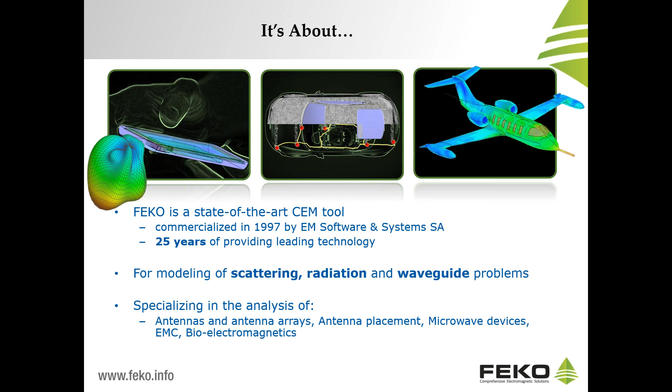Now, one of our major focuses at FEKO is the development of different numerical methods for solving these electromagnetic problems. So we have a range of different methods that are available, and have gone even further to introduce the hybridization of these different solvers. In some cases, by using hybridization approaches, you can provide a best of both worlds solution, whereby you are able to overcome some of the limitations with one method by coupling it to another method that may have advantages in that range. And that's the philosophy that we have here, and the approach is to make all of these solvers available under a single license.

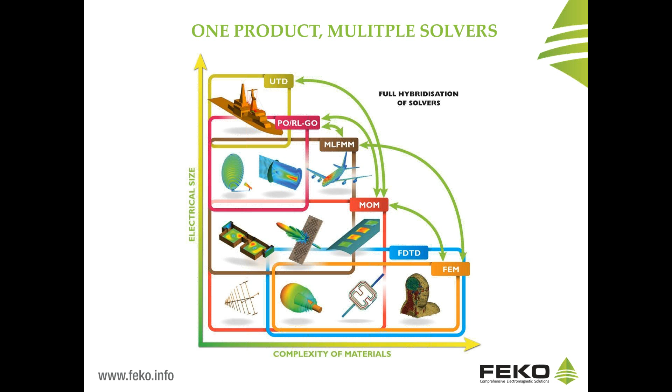So I hope we have prepared an interesting agenda for our talk today, and we're going to look at several different aspects. Initially, we're going to start off looking at some different anatomical phantom models that are available, and obviously this is a key area in many healthcare or bio-EM simulations. So we're just going to review what is available for FEKO. Then we're going to look at two different case studies for MRI, the first being a 7 Tesla head coil design, and the second being a 3 Tesla spinal array.

And in conclusion, we will finish looking at a range of different implant devices, where we are focusing a bit on the antenna design and safety aspects. So that's the agenda for the day. And I think especially for the case studies, we want to look at a somewhat numerical focus to maybe highlight different approaches that can be applied when solving these kind of problems. Obviously there are always different approaches, so we will try to concentrate on certain strengths in that

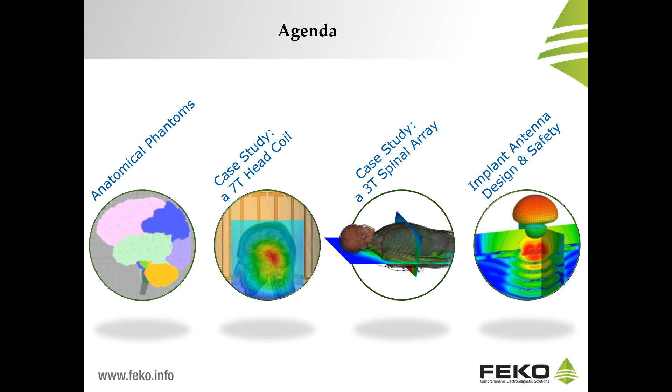area. Okay, so to start off, let's have a look at some interesting anatomical phantom examples. Fairly recently, we have started a partnership with a company called Simpleware that is based in the United Kingdom, and they have a broad range of technologies, but part of this involves the development of anatomical phantoms. And here you can see two different models that we have acquired through them. The first is a full body phantom with 12 different tissues, and the second is a detailed head phantom including a fairly detailed description of the brain.

Now these models are made available through very high quality tetrahedral meshes, which can then be used directly in FEKO using the method of moments and finite element solutions, so the hybridization solver. And furthermore, these phantoms can be remeshed directly in FEKO to be used with our new FDTD solver. So yeah, this is quite exciting news, and for more information

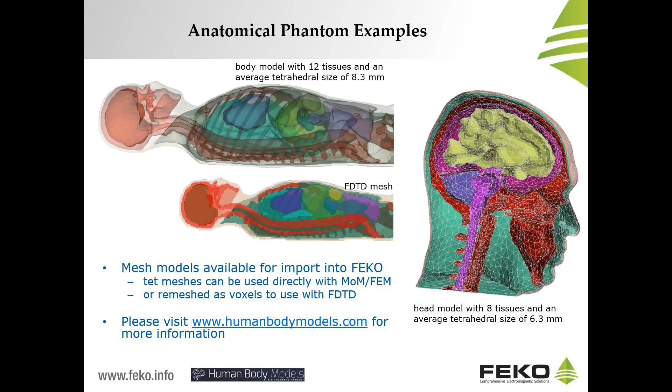Simpleware has the capability, based on a statistical database of different patients where they have acquired measurement data, to perform scaling in both body mass index or BMI and also in age to cover basically the whole human population. And they do that by sampling the statistical model that they have, and then they can interpolate to different stages. So here you can see, for example, the male phantom for different BMI, and an overview of the tissue distributions for those different phantoms.

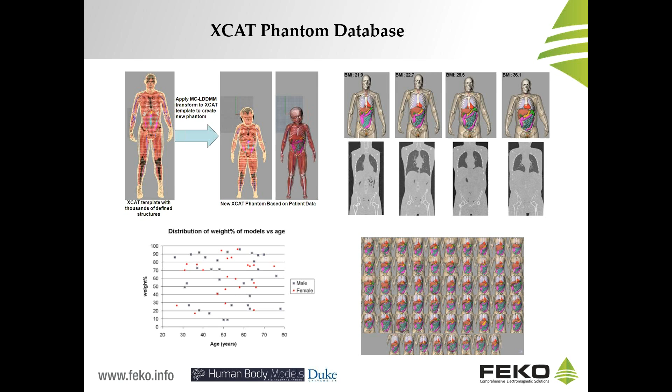And here you can see a bit more detail, again showing the BMI percentile for both male and female phantoms, and also a boy of 1 year old. So starting off with the skeleton, and here you can see the addition of some tissues, and finally the skin layers. So this is quite useful because it allows you to address a very broad range of different subjects to, for example, address those issues that we spoke about before of robust design.

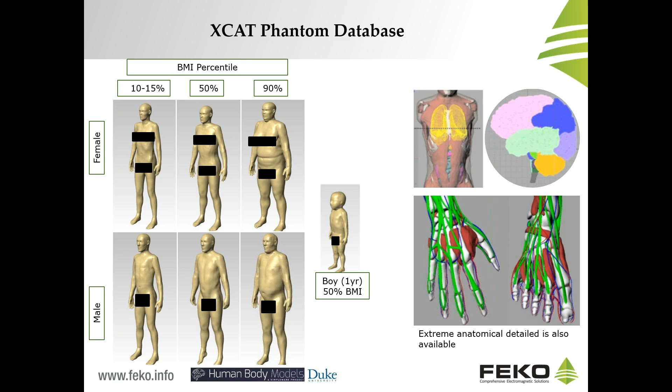Another area where they are very strong is the provision of detailed phantoms, so detailed tissues. They have very high resolution images available, for example, for the lungs, or here you can see some brain tissue, and also veins and arteries in the hand and the feet. So those were the models that are available through Simpleware. In addition, FEKO does have a range of different phantoms available directly, which can be downloaded by customers through our website, and these range from fairly simple homogeneous phantoms through to more complex tetrahedral mesh models from whole body and different head phantoms.

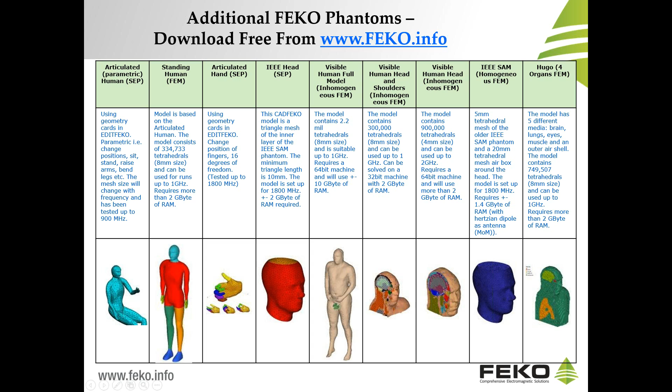Okay, so at this point we are ready to start our first case study, but before we do that, we would like to launch our second poll, which I've just begun, so could you please go ahead and vote. The question is, which solver do we believe is the most suitable method for addressing bioelectromagnetics? Okay, thank you very much.

Okay, so the first case study we would like to look at today is focused on a 7 Tesla head coil design, which was based on a publication by Dr. Wang. Obviously, some of the challenges involved in designing systems at 7 Tesla is addressing homogeneity over a broad region of interest. So we're going to start off looking at the initial design of the system. This is a simple IQ feed birdcage coil, and here you can see the geometry that has been modeled in FEKO.

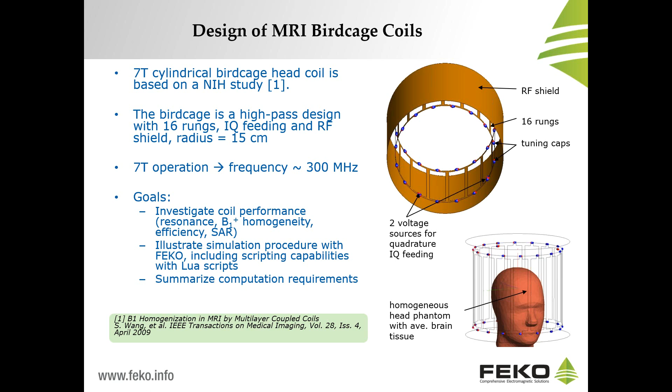And in addition to that, we're going to look at some of the computational requirements for these kind of simulations. Okay, so when you design a system like this, one of the first things that you may be interested in is to ensure that you have, in fact, excited the correct resonant mode for the system. So using the tuning capacitors, we can shift the resonance frequency for the system, and we can look obviously at the S parameters for the system to see that we do indeed have a 50 ohm or near 50 ohm system, but still it could be possible that we are actually exciting not the fundamental IQ or quadrature mode for the system. So here you can see some different ways of interpreting the actual resonance for the system.

So obviously near resonance for the empty birdcage coil, we would expect to see a homogeneous field distribution, which can nicely be seen here. This is the magnetic field at the center of the coil. Another way to visualize the resonance is then also looking at the polarization of the field. And here we are just showing basically the animation of the vector field view, again at the center of the coil. So we're basically changing the phase of the field, and you can nicely see the rotational component of the magnetic field as we expect here.

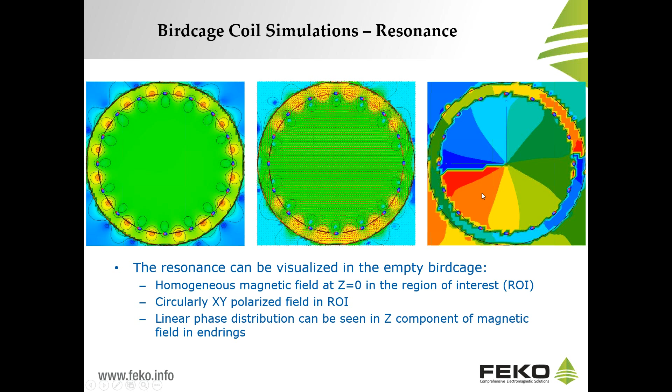Then in addition, we would like to look obviously at the B1 plus field or the B1 minus field. And here you can see the B1 plus field and polarization efficiency, which is calculated by the ratio of B1 plus over B1 minus, in both cases at the center of the coil. So here we're still looking at the empty coil, so things are quite straightforward as we expect.

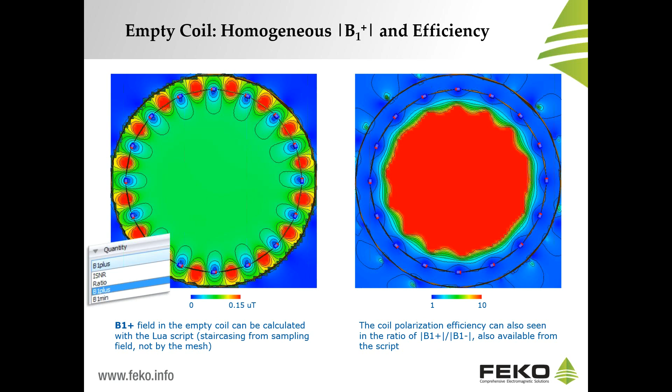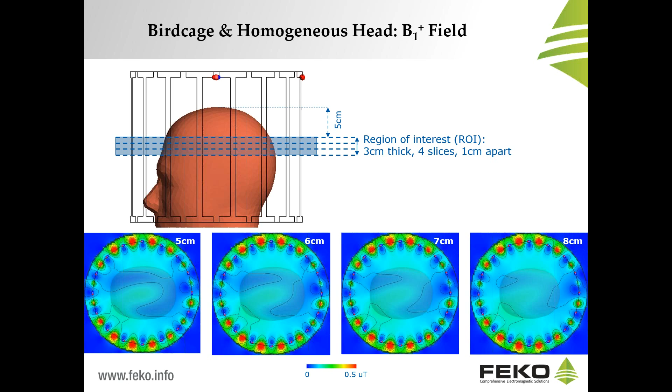In the next step, we introduce an anatomical, a homogeneous head phantom, and we start to use this as a load for the coil to assess the field distribution in the region of interest. And what we see obviously now is by introducing the load that the field is no longer quite as homogeneous as we had seen before. And we can also look at this, here I'm showing a sort of 2D plot across the region of interest, at 4 different slices. So what we see then is the homogeneity now is about 30 to 50% from the peak in the center down to the trough there. So this is, I think, quite standard for initial design.

And in the paper by Dr. Wang, he proposes an approach whereby he uses elliptical elements, sort of a parasitic array, to improve the homogeneity in the head. So he introduces these elements to improve the homogeneity in the region of interest. In addition, here you can just see the SAR distribution. This is the unaveraged SAR, but we can also calculate the spatial peak average SAR, to ensure that the system is within the limits.

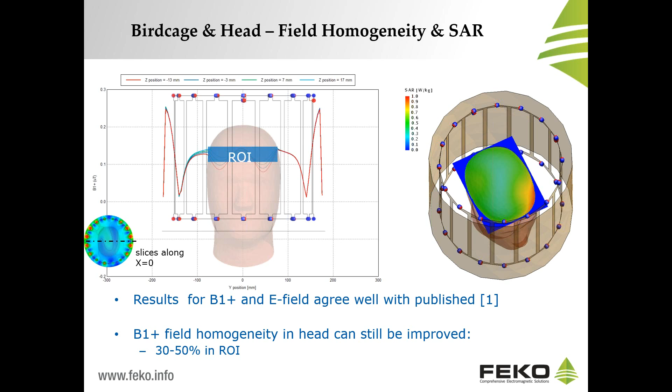And in the final step then, using the head model that I showed before from Simpleware, we evaluate the B1 field again under realistic loaded conditions. So here you can really assess, well, what sort of B1 field magnitudes am I able to achieve in specific tissues, for example, or certain regions or subregions there.

Now, just some general comments, firstly about electromagnetic simulation here and the approach that we followed. Initially, we have chosen method of moments to simulate the empty coil, and method of moments is quite suitable in this case for several reasons. Firstly, it resolves the curvature of the round coil very well using the triangular mesh, and obviously inherently captures the actual currents that are flowing on the system very accurately. That's quite fundamental to method of moments. Secondly, it is also quite attractive from a computational point of view. The simulation of the empty coil can be run in less than a minute and uses a negligible amount of RAM.

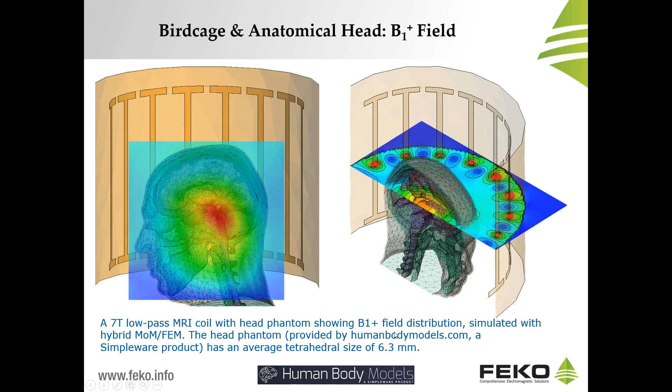In this case we used a pretty fine resolution. I think the average size was about 6.3 millimeters for the tissues, and in some cases, where there was detail, we had more elements.

We can see now the simulation time is still acceptable, but we have quite an increase in RAM. Depending on our choice here, we could also maybe use FDTD in this range.

But I think what is most interesting here is that, especially for the empty coil and possibly also with the homogeneous phantom, we can still consider using optimization strategies because the individual simulation time is very low. So we could follow an approach using our genetic algorithm-based optimization, for example, either to try improve the field homogeneity or improve the field deposition in other regions.

These simulations were run just on a Lenovo laptop, and of course you can also use a more powerful computer to improve the simulation time.

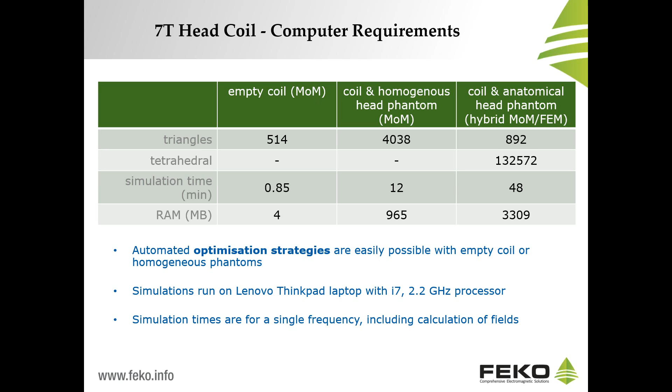We wanted to achieve that the array is tuned and matched at 124 megahertz. We plan to do this using distributed capacitors through each loop, and also introducing a matching network for each individual loop. The design goal was to achieve an S11 or S parameters below minus 15 dB, and for coupling we wanted to achieve minus 10 dB between neighbors.

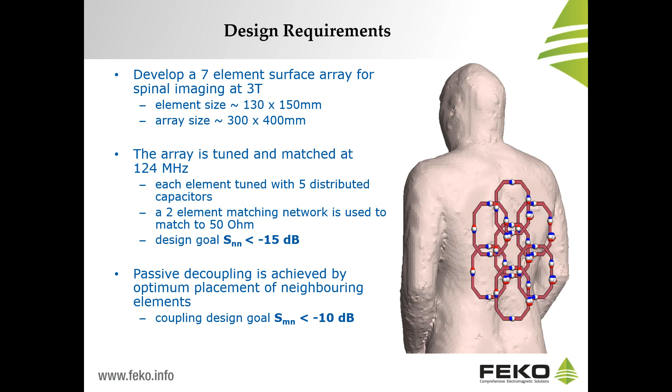We started off with the single loop design to illustrate again what we've said before. We have a feeding port with the matching network, and then we introduce the 5 capacitors for tuning the system. The goal is to have a nice homogeneous field around the loop, and this is improved using the distributed capacitor system.

Here again we have an interesting approach to deal with the optimization. It's a somewhat complex system to optimize, and one attractive approach is to introduce a homogeneous half space using a muscle-like tissue. Using this approach, that needs to be simulated with method of moments.

We can basically emulate the proximity of the human body to the array. In other words, the array sees at least a semi-realistic body load, and we can do this without actually increasing the computational requirements in any way. This may mean we are able to run an automated optimization over the whole system to achieve the S-parameter design goals.

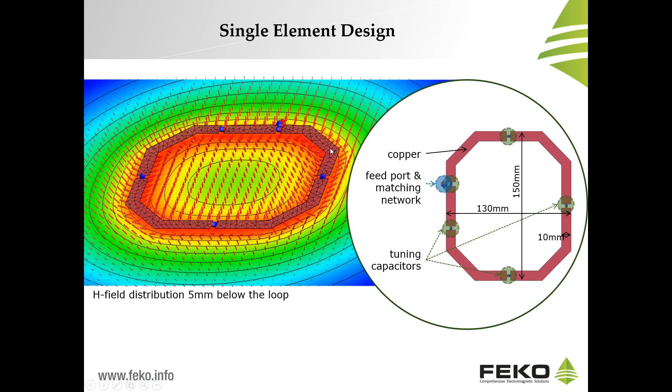From here we can basically populate the initial idea for the array, which you can see here, and we then feed this into our optimization system. We use initially an orthogonal spacing of 2 millimeters between the elements, so they stack up vertically.

Basically we look at the lateral positions for the 4 elements in this area, meaning that we move them in y plus and y minus, and x plus and x minus around there, and also the spacing of the outer elements.

So basically we pass all of these variables to the optimization. An individual element simulates in about a minute, but now we have added 7, so we can expect the simulation time to be slightly larger, but still well within what can be used for an automated optimization.

We see then that the optimization takes, in this case, less than 2 hours. It was about 2 hours, and converges in 39 iterations.

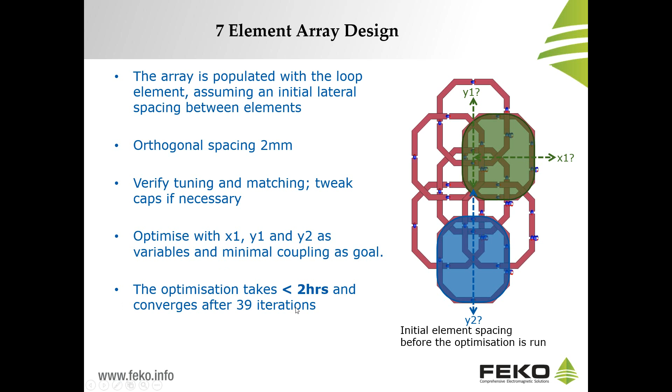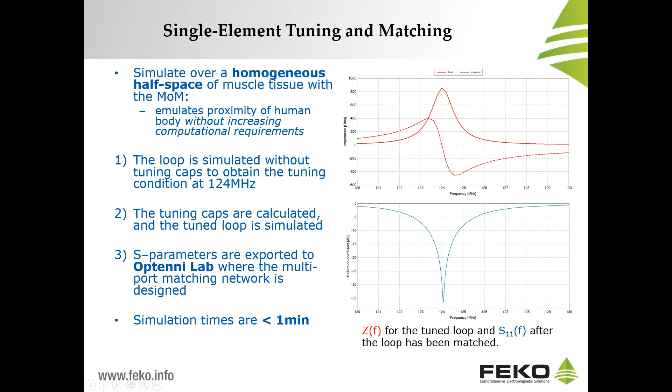Once we have obtained the best design, we use a third-party software tool called Optenni Lab, which is a tool for automated matching network design. One of the very attractive features is that the tool also allows us to do multi-port matching, so we can do simultaneous multi-channel matching for our array.

Here you can see the S parameter results, where we want it to be under minus 10 dB for the coupling, and minus 15 dB for the individual ports.

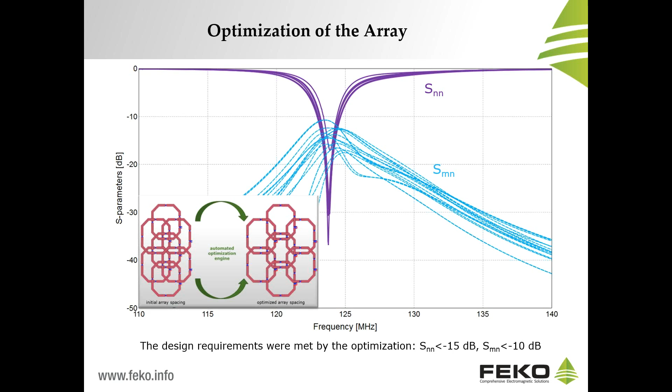Here what we are showing is the initial spacing and how the optimizer has now generated the optimal geometry for the array. Remembering now, this was done as an initial first step using this concept of a homogeneous half space, and obviously in the next step we may need to do some fine-tuning or tweaking of the design.

So let's have a look again at the computational requirements for these simulations. Initially, the simulation time for the full array using the dielectric half space was solved in about 3 minutes and uses about 200 megabytes of RAM.

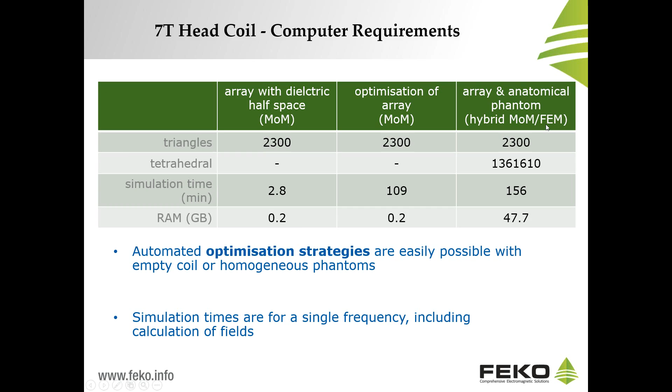Again, when we are using the MOM and FEM regions, just for clarity, what that actually implies is the actual array is still simulated using method of moments, and we then apply finite element, coupling it into the finite element discretization of the anatomical tissues.

Okay, so in closing today, I would just like to show a few different simulations or technologies related to implant antenna design or safety.

The first of these is an injectable implant designed for the 2.45 band, that's the ISM band. Already by the name, an injectable implant has some very strict geometrical constraints. The diameter has to be less than basically a millimeter to allow it to be injected, and the length cannot be too long. Here it's about 2 centimeters in length.

So already just from the size constraints, the design lends itself quite intuitively to a high frequency design. Otherwise it would be very challenging to design an antenna at lower frequencies to work in the system. It's quite a novel technology, and the idea of having an implant that does not require surgery and can be injected very easily into the patient is obviously very attractive. I think there are basically some biosensors also included in the design which will then record certain vital signs.

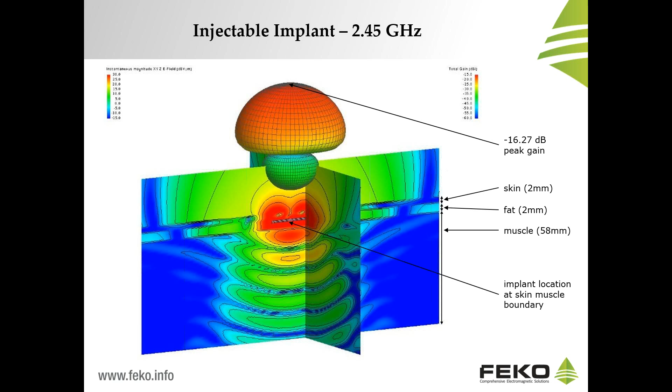Then another very interesting aspect when talking about implants is the compatibility or usage scenario for MR environments. The issues important there are what sort of local SAR you have in the region of the implant, and also the heating that may occur through localized or induced currents on the implant.

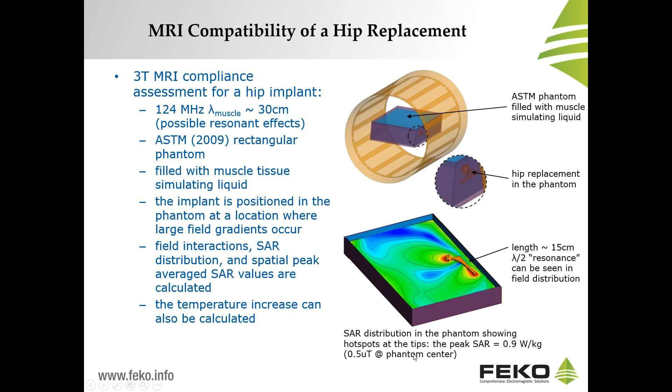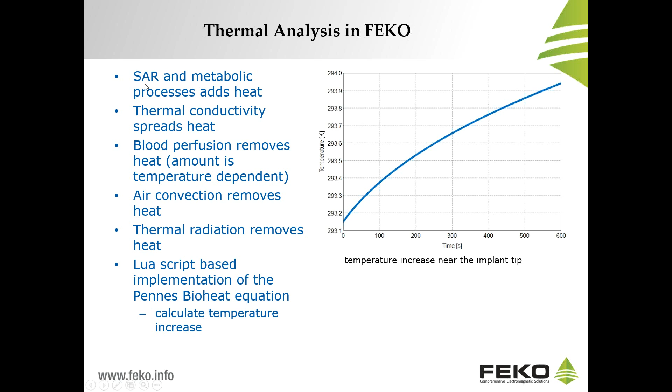And just before we get to the conclusions, to wrap up, if you are interested in using the temperature script, you can find the script available for download under our Lua scripting section in the website. There are also some examples included illustrating how it can be used, so please do go ahead and download that for usage.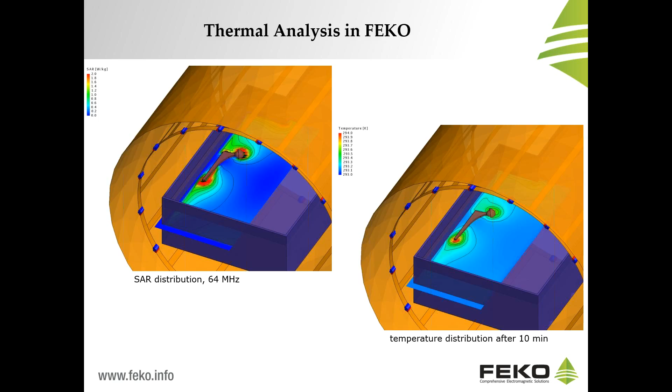So just to conclude our talk today before we open up for any questions, as we said before, I think this is a fascinating time period for the healthcare industry in terms of the technology that is being developed, and there seems to be a very strong correlation between this technology development and the wireless technology industry in general. So they seem to grow hand in hand, and the future really looks very attractive in terms of healthcare and the new systems that are being developed.

At the same time, FEKO has a proven record for accurate simulation and design for antennas, and is prevalent in the healthcare industry to support this technology surge in a role to try to design and improve the products that are available and ultimately lead to better products for the industry.